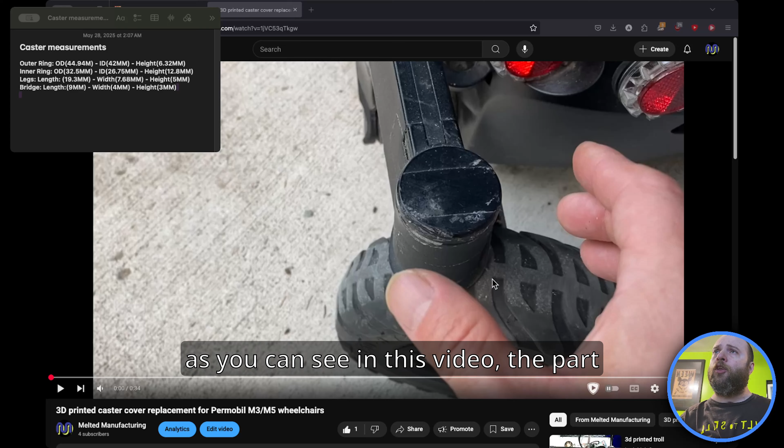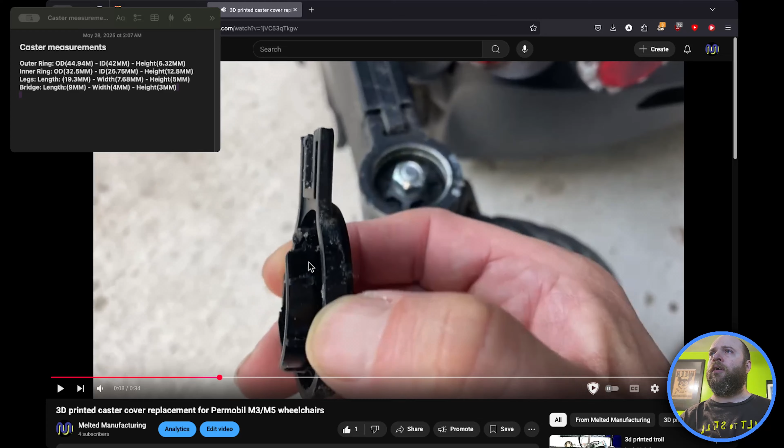As you can see in this video, the part I'm replacing was taped on because it was always falling off, and you can see it's made of pretty brittle plastic. It's all broken up, scuffed all over the place.

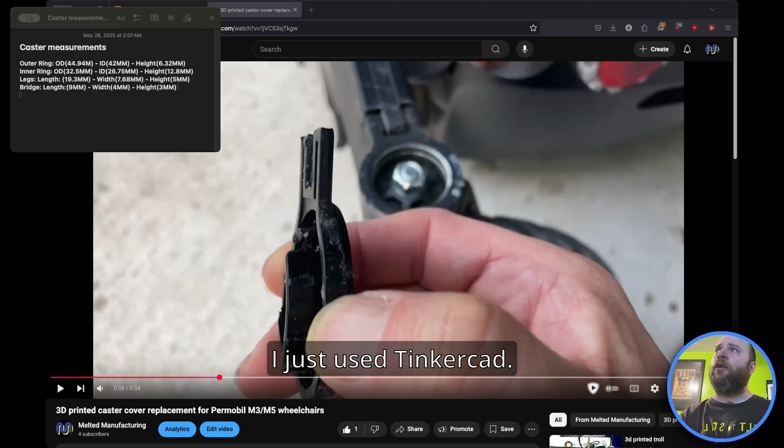So let's go through the process I went through to make this part. So it's pretty easy. I just used Tinkercad. I had not used Fusion or Onshape or FreeCAD at any point by this time. So this is what the finished product looked like in CAD, and you can see the measurements right here in the top corner.

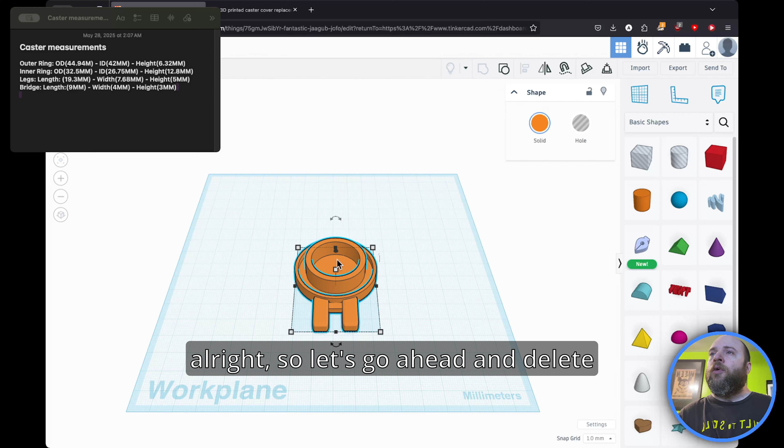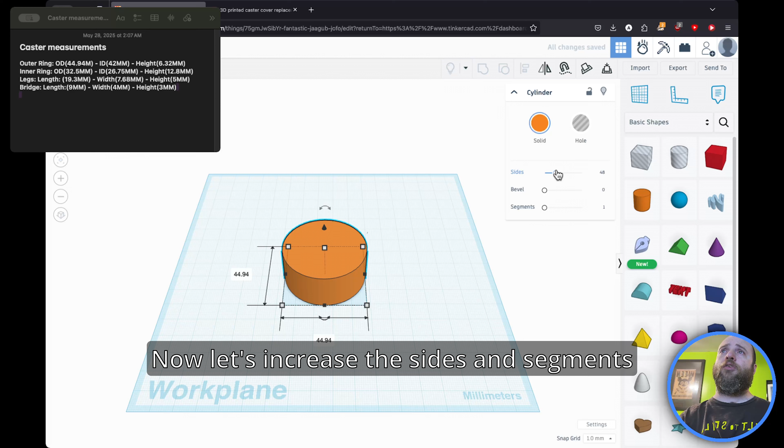Alright, so let's go ahead and delete this and we'll recreate it. So this first part is the outer ring, and it is 44.94 millimeters. Now let's increase the sides and segments just to make the part smoother. Now the inner diameter is 42 millimeters. So let's make that real quick.

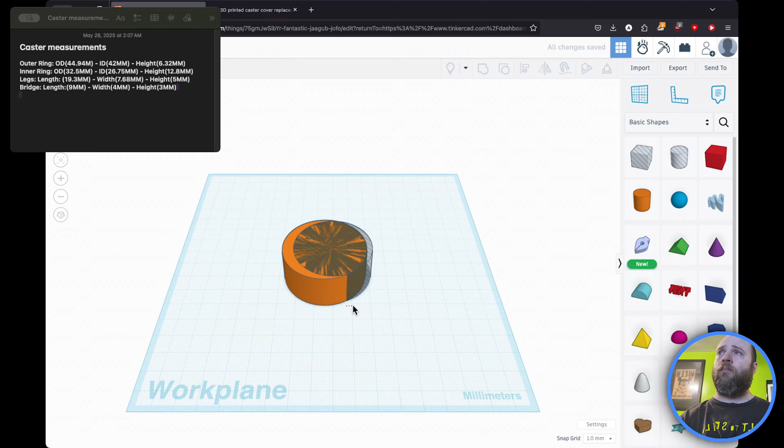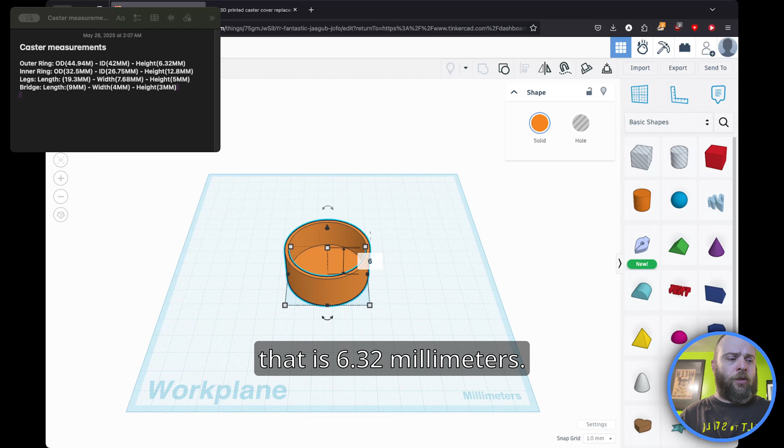Then we'll line them up. Alright, so we got them lined up. Let's raise this inner circle 3 millimeters so this bottom part isn't hollow. Then we'll join them. Alright, so we got our first part. Just gotta adjust the height now. And the height for that is 6.32 millimeters. Now we'll move on to the inner circle.

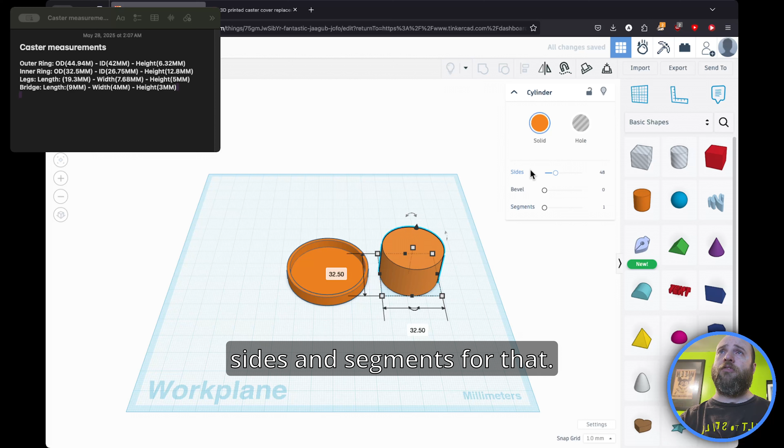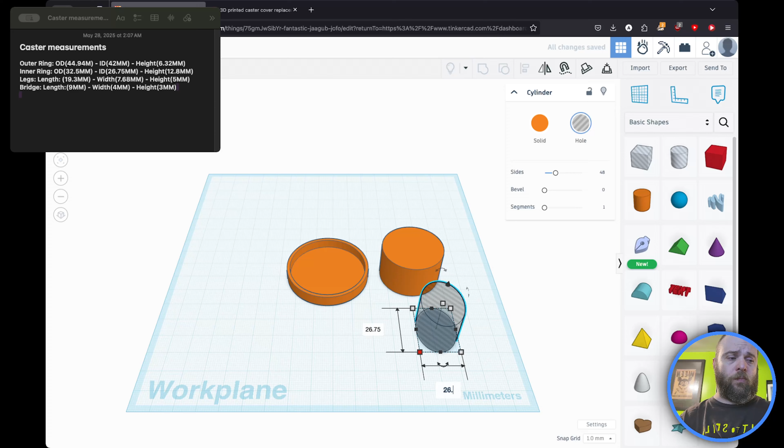For the inner circle, we have 32.5 millimeters. All right, and let's turn up the sides and segments for that. Now, let's see, that will be 26.75 for this circle. All right, let's line these two up.

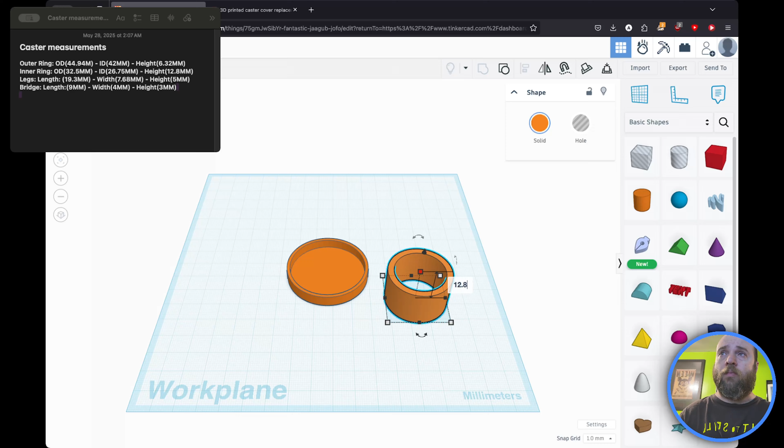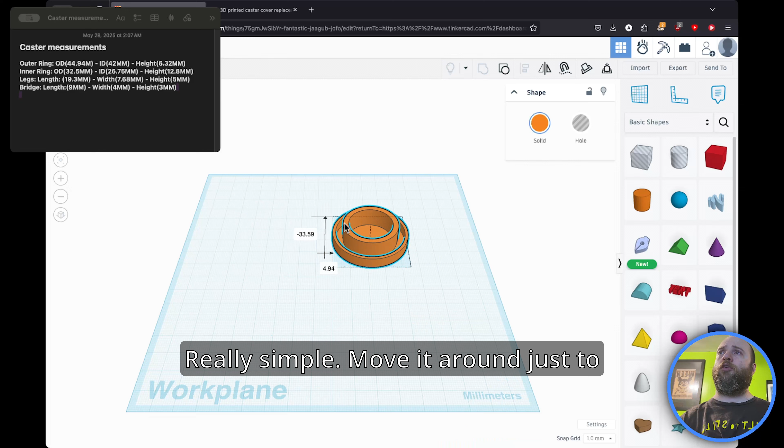It's okay if this one's hollow, because it's going to sit on top of this part. We just need to get the right height. And that height is 12.8 millimeters. Alright, now let's line these two up. Alright, nice and lined up. Join those. Now, take a look at our part. See how it looks? Looks pretty nice. Really simple. Move it around just to make sure it's all one part. Great. That was pretty simple, pretty easy.

Alright, so let's move on to the next part. We'll move on to the legs. Now we need two of these. So we'll just drag out a square. So the legs are 19.3 millimeters long. And look at that, I can't type. And they are 7.68 millimeters wide, 5 millimeters tall. Alright. Now let's duplicate that, save us some time.

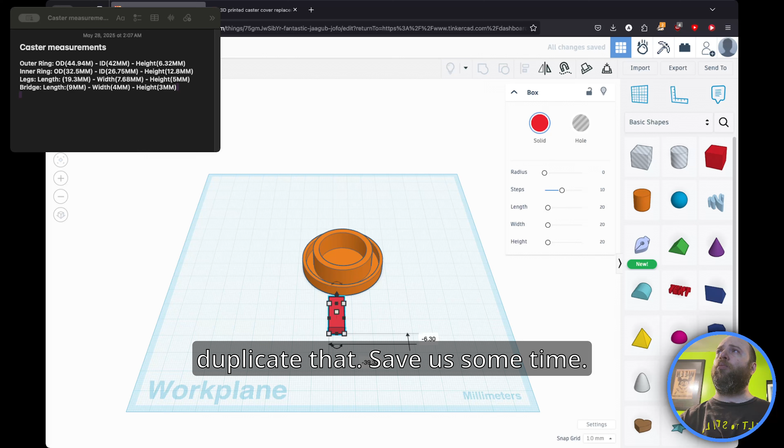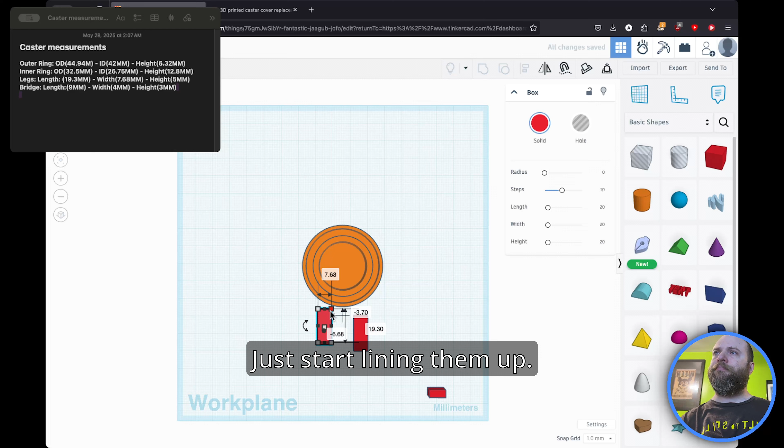Now there's a bridge between these legs, and that is 9 millimeters long and 4 millimeters wide. And it is 3 millimeters tall. Alright, so now let's get these legs in the right place. Just start lining them up.

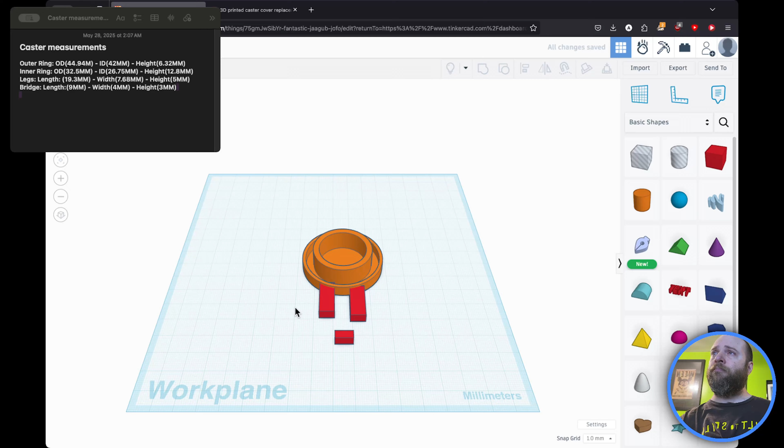And using Tinkercad, it's not as precise as a real CAD program, so you're doing a lot of guessing. I didn't get this correct on the first print. I had to print it out quite a few times to get it to fit correctly. But that's just all part of the process, and you get better with that as time goes on.

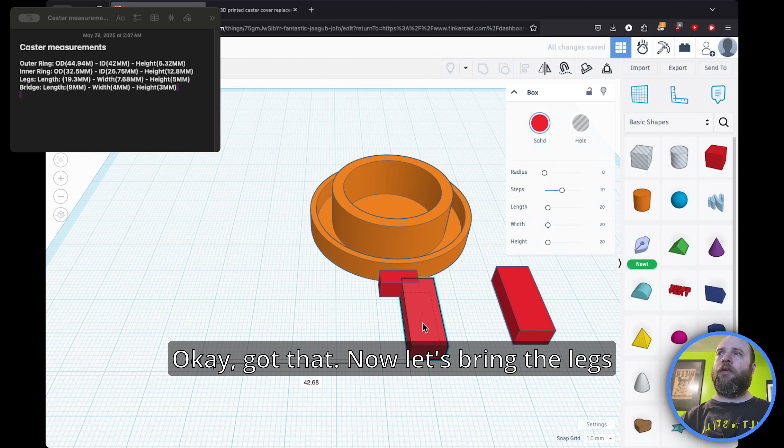So alright, let's get these all together. First, let's center these two, and that makes centering the legs easy. Okay, got that. Now let's bring the legs right to the edge of the bridge. Now we turn up the radius a little on these just to make them not so square. They look a little nicer that way once they're printed.

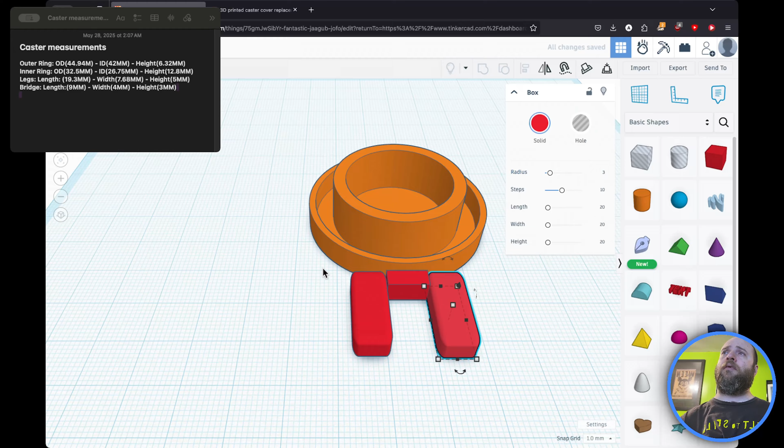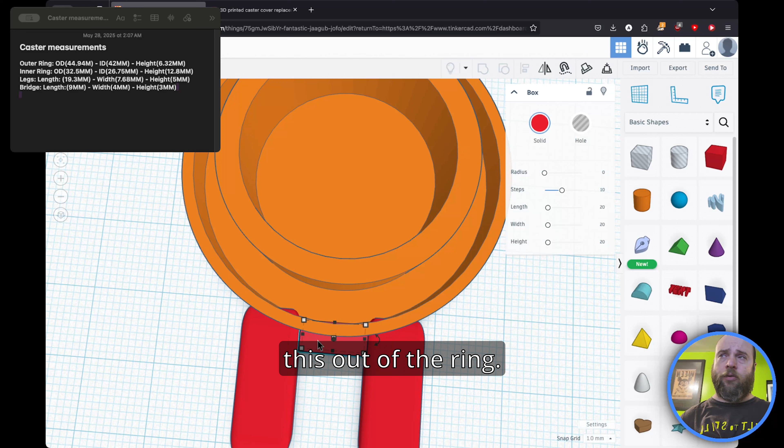Alright, we'll zoom in a little bit. Look from the top. Alright, let's click these three. We got these three, and now we'll line them up to about the edge. Okay. Now back this out of the ring. There we are. Now let's check all our dimensions.

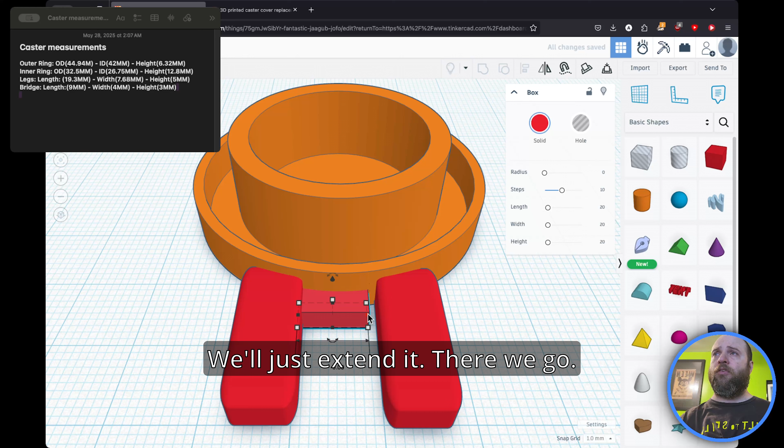This doesn't look right, so let's redo that. That's 5 millimeters. That needs to be 3 millimeters. Okay, that's better. Move it over a little. You can see a gap there. We'll just extend it. There we go. Now you can see that part of these legs are coming into these rings, so we got to fix that real quick. Let's ungroup this. One more ungroup.

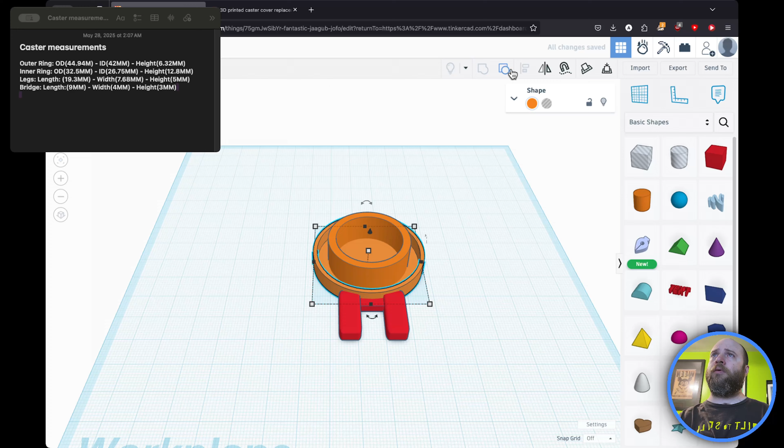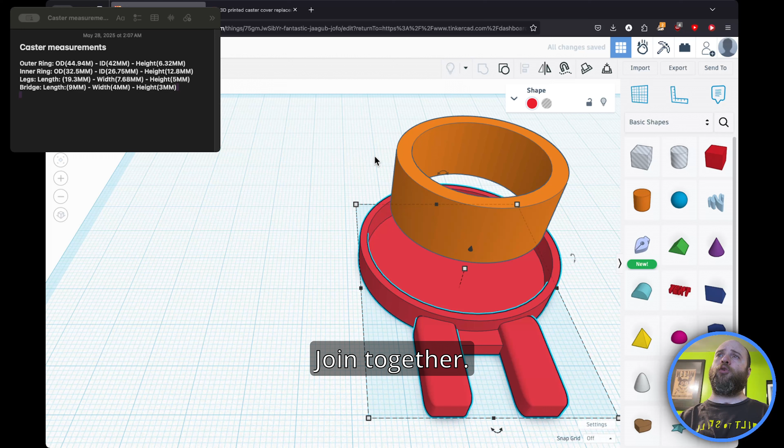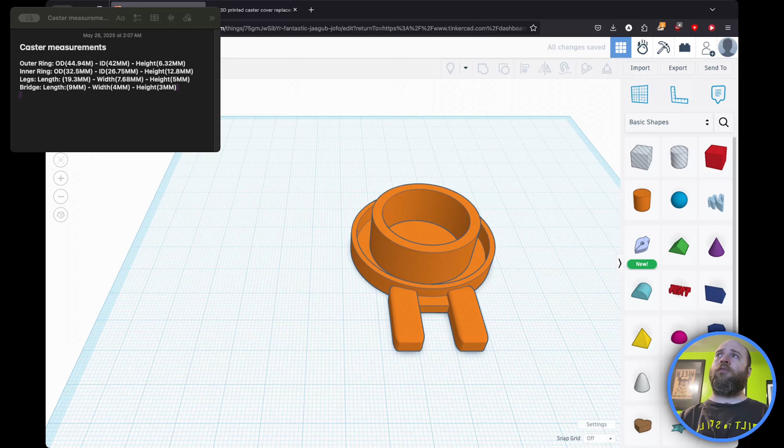Let's raise this up out of the way. And then now we'll make this all one group right here. Join together. Bring this back down to 0. Oops, don't want to do that. Make sure everything's lined up again. Just be safe. Yep, it's lined up. Now let's join it. Alright, one solid piece. And that's all it takes to make a part. It's that easy in Tinkercad.

Just experiment and play around and you'll eventually get it. So that was the process I went through in Tinkercad. It was pretty simple shapes. It was a simple design.